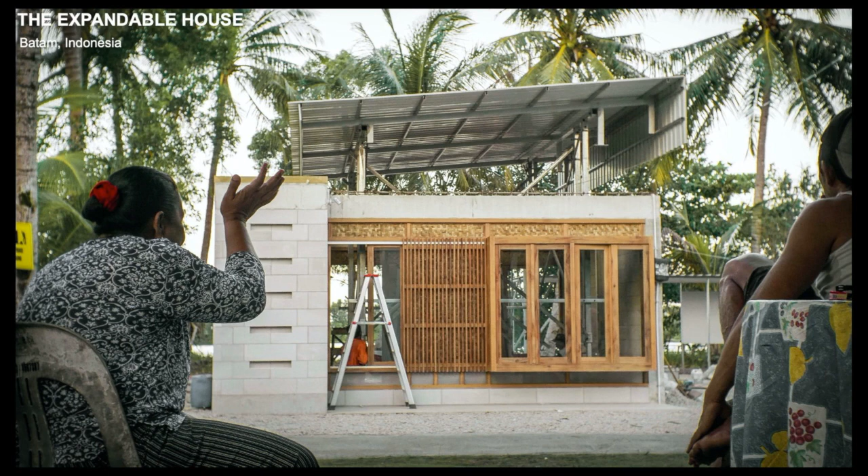So this pilot project is a collaboration between FCL and the community of Kampung Melayu Tua, Batam, Indonesia. The expandable house, or rumah tambah in Bahasa Indonesia, is designed to be a new type of dwelling that can be adapted to many different locations in rapidly urbanizing regions.

Why should we respond to urbanization? Asia has experienced rapid urbanization, especially in the monsoon area, where the land is fertile for food staple production, but also experiences rapid population growth. 60% of the world's population now is living in Asia.

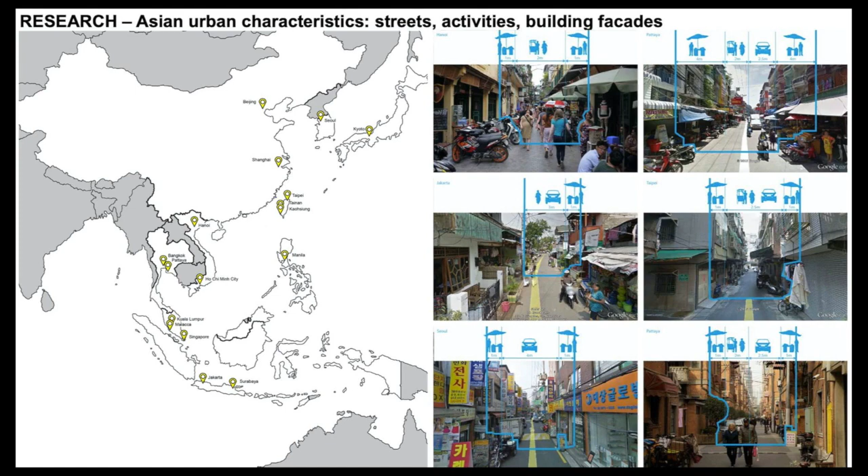Everyday life in Asian urban areas is inspiring us. So we researched 17 cities in Asia, focusing on street, living and working space production, and building facades. We learn how people do their livelihood and organize their limited space.

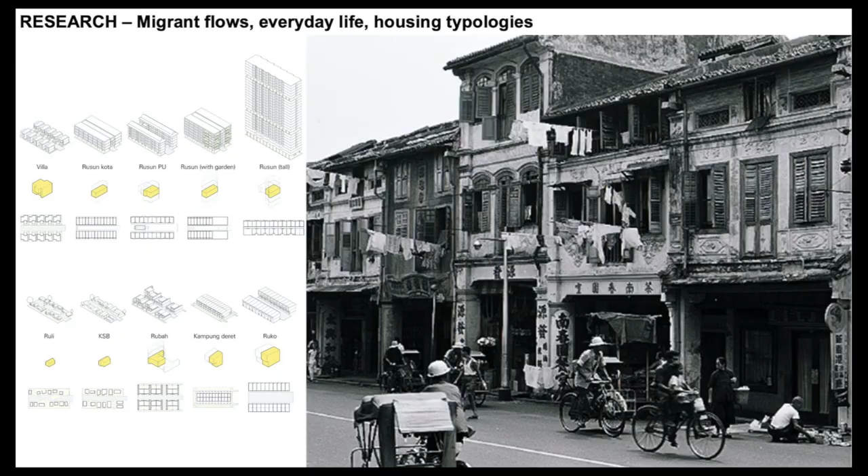Urbanization is inseparable from the contribution of migration flows from villages and towns. So we learn this particular group, including house typologies for accommodation of increasing population, such as landed houses, social housing, shop houses, and so on.

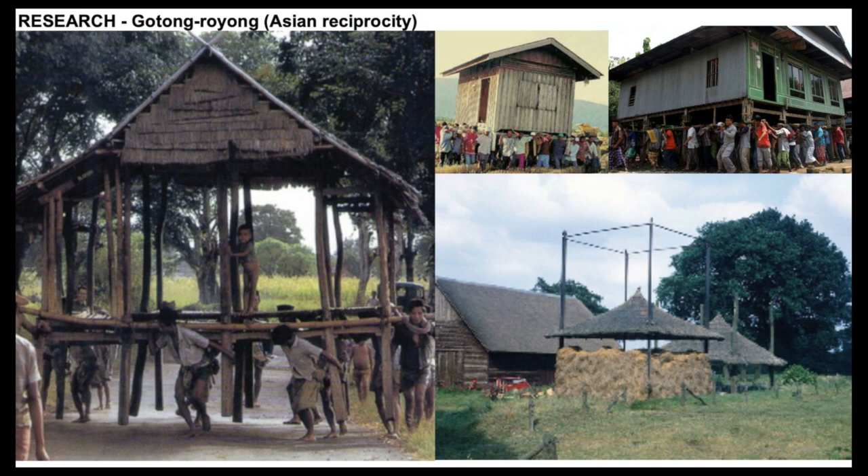Gotong royong is a fascinating culture embedded in Asian communities in many aspects of their life. During COVID-19, we can see gotong royong across the world, helping each other. In Asia, gotong royong includes building houses, changing their address by literally moving their house.

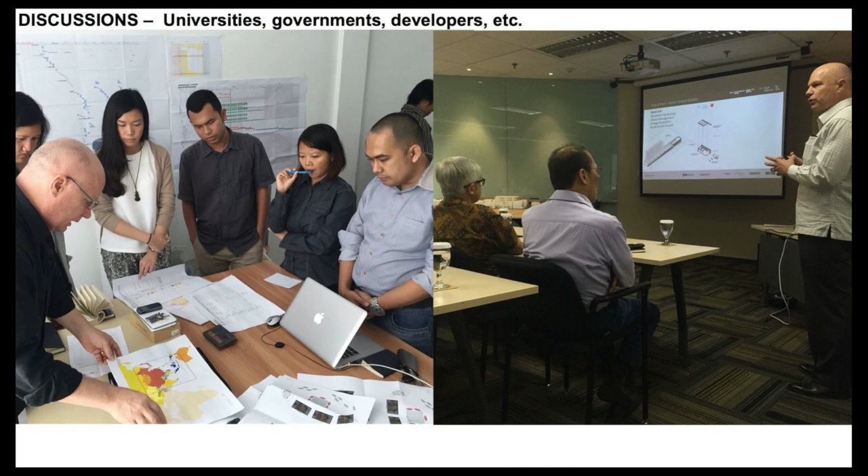So we chose Batam as the case study because we want to have grounded research, and it's one of ASEAN's urbanizing cities, close to Singapore. We discussed the concept of sustainable settlement with parties in Indonesia and Singapore for having the interwoven logic between theory and practice. There is unsustainable implementation of development concepts due to agricultural land conversion and environmental destruction.

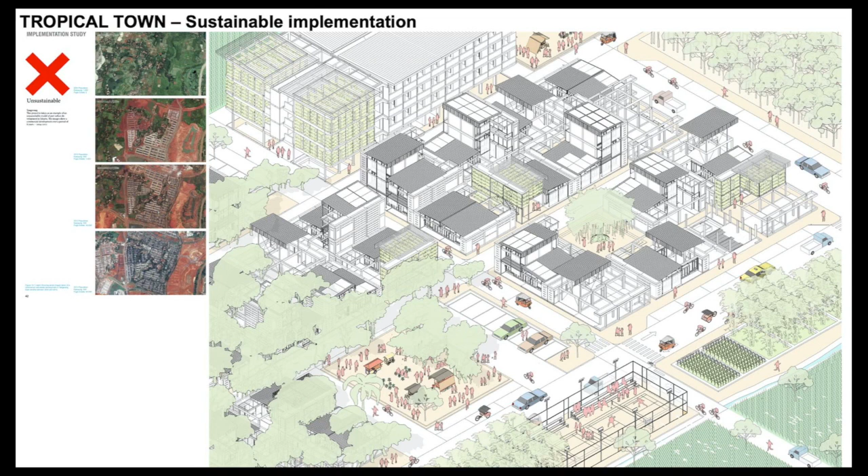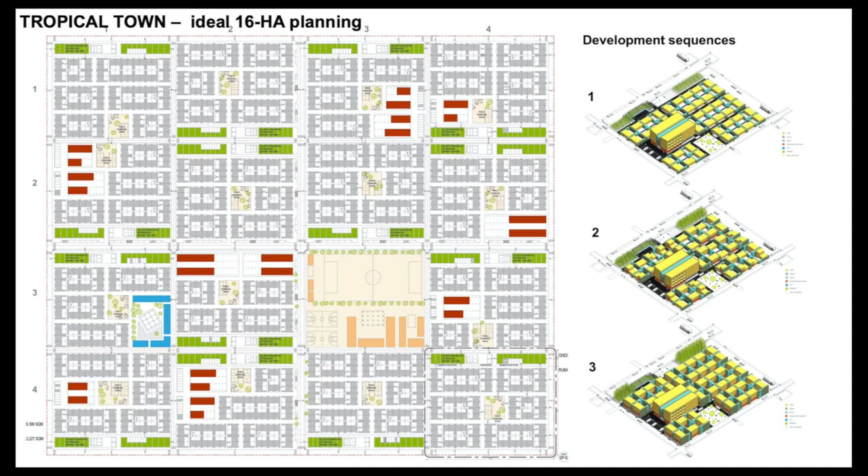So we intend to think carefully about the concept as well as the implementation of sustainable settlement, which is tropical town, we call it, containing hybrid urban-rural land uses. The 16-hectare idealized tropical town has 1 hectare dedicated to public facilities and the other 15 hectares with different designs, combining housing, space, and infrastructure. So tropical town follows incremental development as an Asian characteristic.

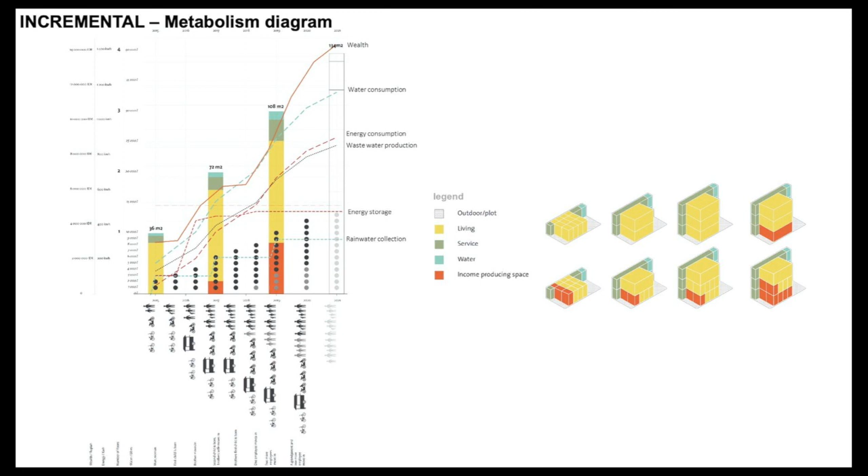Incrementalism is the logic for tropical town and the expandable house. The metabolism diagram shows that in the first year, a household needs 36 square meters. When they have increased income and more household members, there will be increasing needs for space, water, and energy consumption.

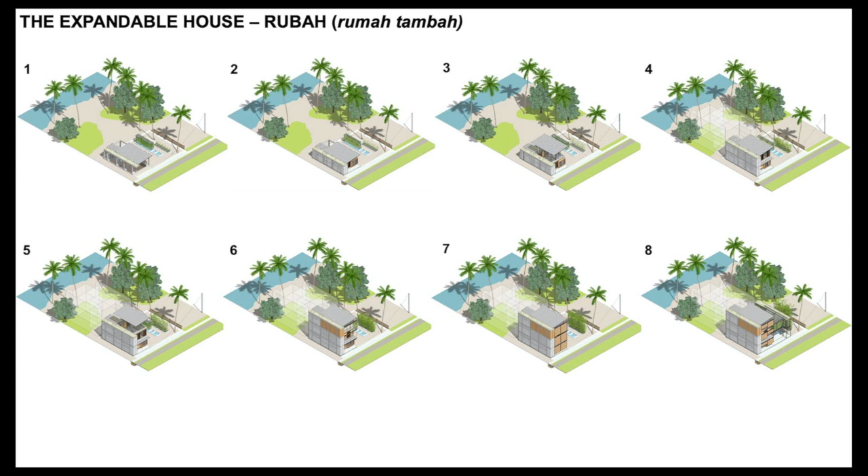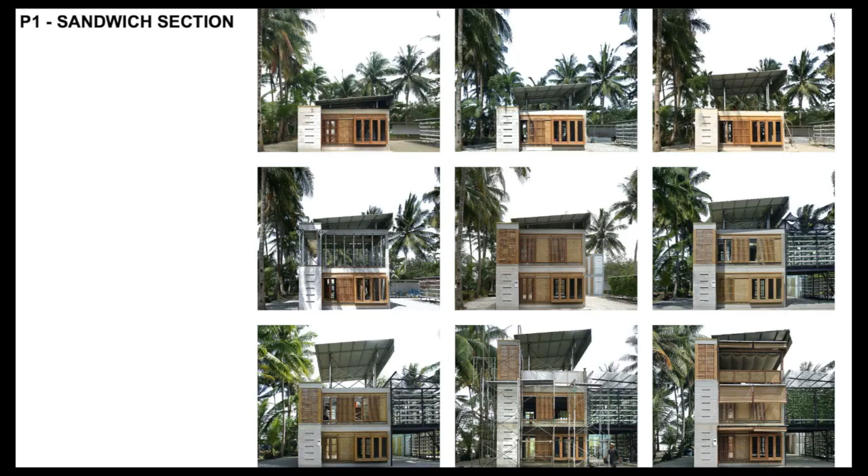The expandable house is designed around 5 principles. The first principle is the sandwich system. The house provides a hoisted roof, floor, and foundation as a bread that supports up to 3 floors as filling. The system allows flexible financing, whereby the developer provides the first floor and the resident provides infill as their budget allows.

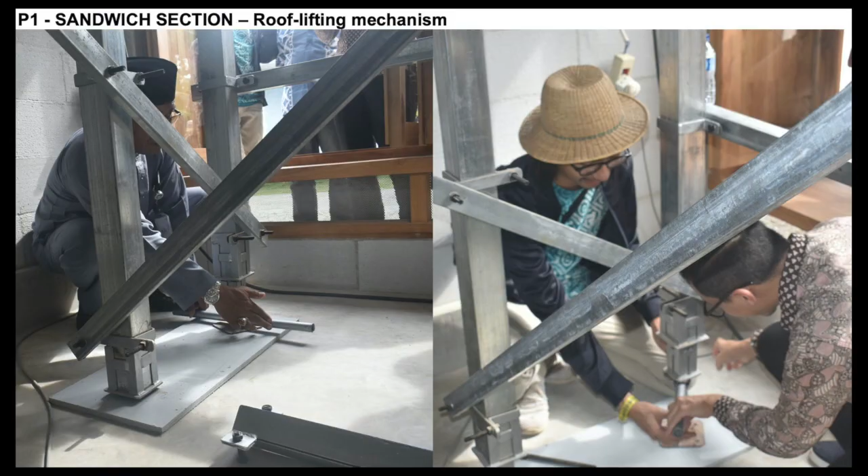We experimented mindfully with the mechanism for hoisting the roof, focusing on four supporting main points. 8 people must work together at the same time to lift up the roof by spinning the lever. So we invited people to try this and got feedback from them.

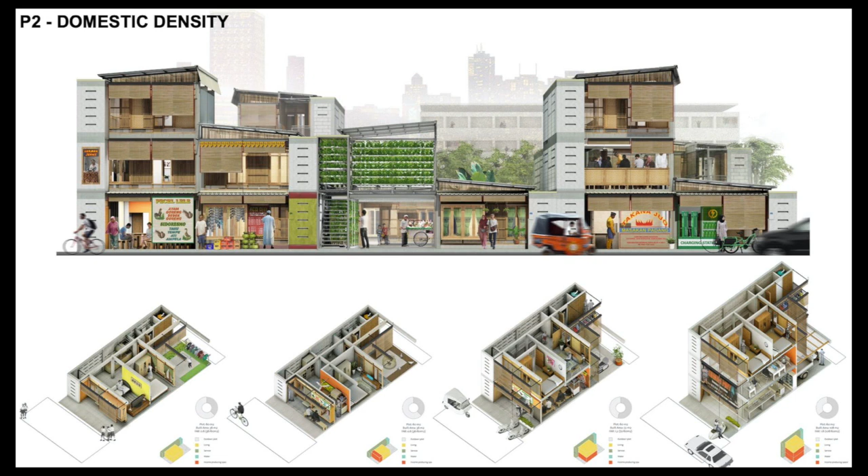The second principle is domestic density. The house promotes domestic densification in the vertical dimension, supporting the benefit of co-location of dwelling and employment. It helps to reduce land footprint and expensive infrastructure networks.

The third principle is seed package. The house is designed as a seed package. Technology, local materials, and planning guidelines are developed in different ways depending on local conditions. We intend that the first tropical town will grow from this common seed.

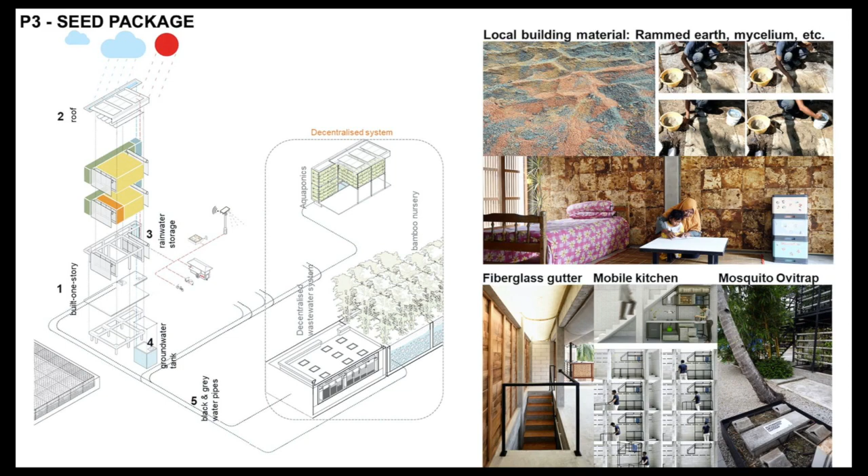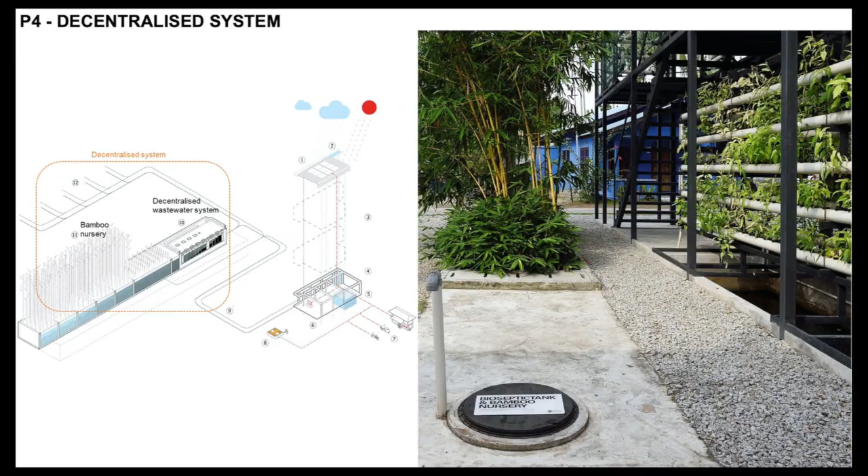So the fourth principle is decentralized systems, which are designed for 100 houses. Sewage, septic tank, and passive cooling principles are integrated locally with the house, avoiding expensive and often unreliable centralized approaches to infrastructure provision.

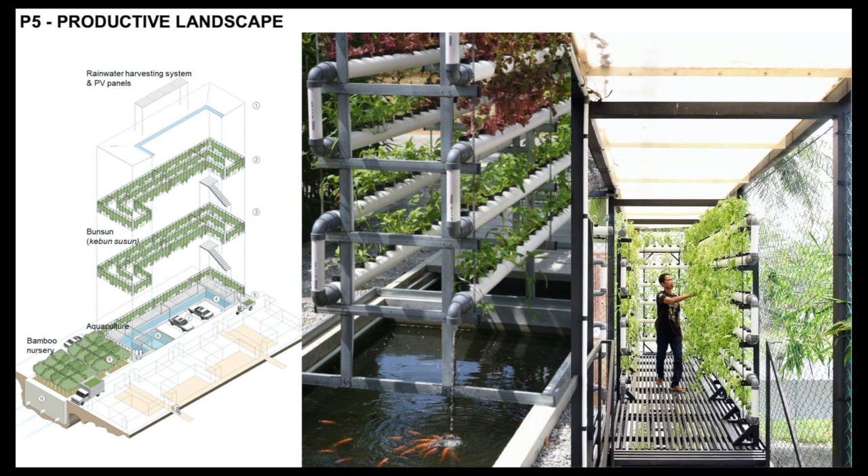The fifth principle is a productive landscape. The house integrates food and building material production locally through a bamboo nursery and vertical kitchen garden, which help further diversify the resources of the house. Together with the community, we learn fish farming and hydroponics, including selling the yield.

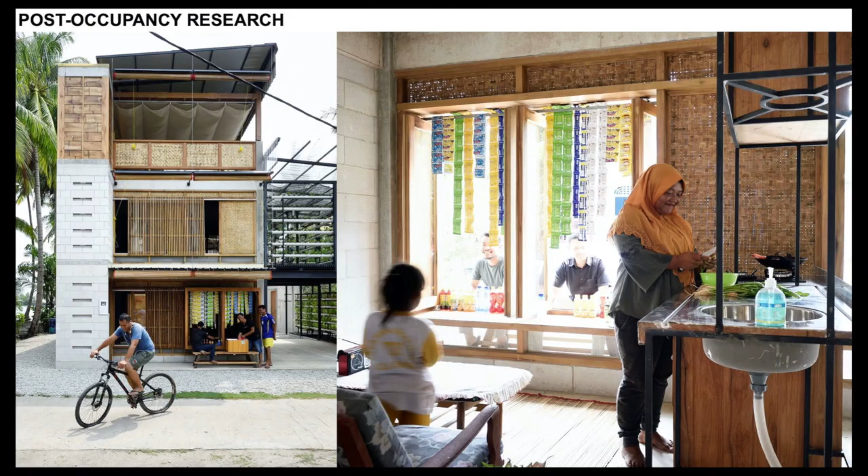During the construction of the house, we still had an opportunity to exchange knowledge through discussion with governments, developers, architects, students, and get their feedback. This also involved the community. For example, the women's group was very active in helping to provide lunch packages containing local food for visitors. We handed over the house to the community in February 2020.

The current function is for gathering, the local clinic, and commercial space on the first floor. We are done with the post-occupancy research involving the community to take daily notes on energy and water consumption.